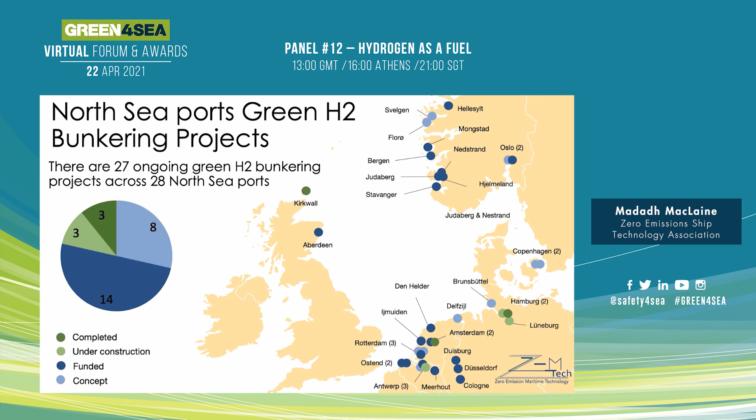So we've got momentum, this is moving forward. I think one of the biggest issues that we talk about in hydrogen is for the larger seagoing vessels.

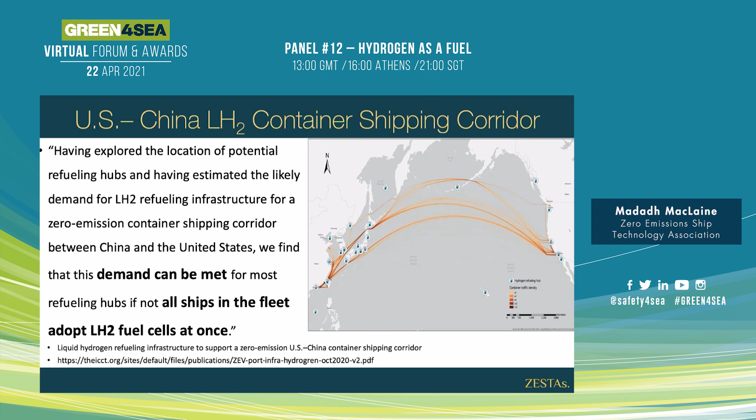The ICCT - well known for the study that exposed VW, I think that's what they're best known for - have done a study on a route from the US to China looking at container ships, and found that all vessels on that fleet could transition to liquid hydrogen. There'd be a slight shift in operational profile; some vessels would need to stop and bunker in the Aleutians, but this was found to actually be on their route. So with a shift in operational profile, all vessels, the largest vessels transiting from Asia to California, would be able to operate on liquid hydrogen. I've put the reference in there, so if this is shared, which I hope it will be, you'll be able to look that up for yourselves.

Another thing we talk about is the cost of hydrogen. I think one of the problems is that renewable energy and green hydrogen projects are really at pilot stages - we're talking megawatts now in hydrogen production. We really need to be talking about gigawatts.

And when we get to 2030, we will be talking about gigawatts, and we will have achieved economies of scale and a levelized cost of hydrogen of around $2 a kilo. That translates to 2,000 US per ton. Now, the energy ratio between hydrogen and low sulfur fuel oil is around 3.3. So if we take the price of low sulfur fuel oil in Rotterdam on the 1st of April, in equivalent energy, that's 1,666.5 dollars US for low sulfur fuel oil to equal the energy of 1 ton of hydrogen.

Going forward, we can be assured that there will be market-based measures. We don't know what and how much, but given the conversations happening, we can assume they'll be around 100 to 300 dollars US. This would bring the price of low sulfur fuel oil up to around 2,000 to 2,500 equivalent energy post 2030. So you can see that's equalizing that price, equal or even less, for hydrogen in 2030.

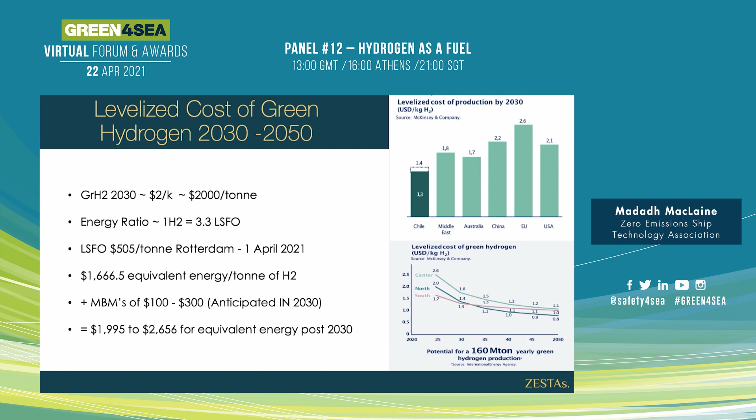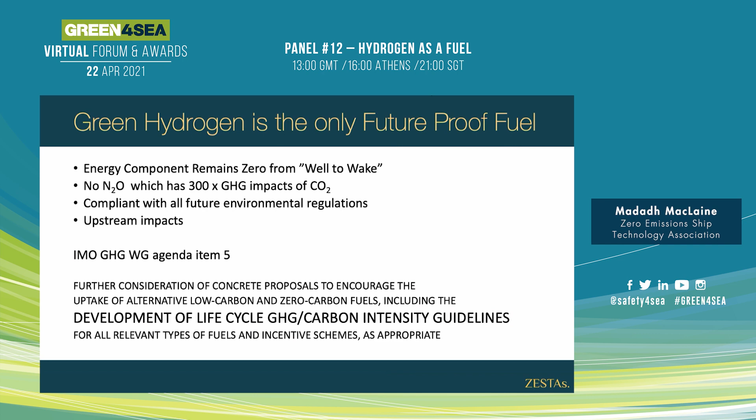So the reason why the Zero Emission Ship Technology Association gets behind green hydrogen is that it's the only fuel where the energy component remains zero from well to wake. There's no nitrous oxide, which has 300 times the greenhouse gas impacts of CO2. It will be compliant with all future environmental regulations due to the lack of upstream impacts. This is very important when we look at IMO greenhouse gas working group agenda item 5, where we'll be looking at considering upstream impacts, and the development of life cycle greenhouse gas carbon intensity guidelines for shipping. So green hydrogen is the only maritime fuel accepted as zero by zero greenhouse gas emissions by the Zero Emission Ship Technology Association.

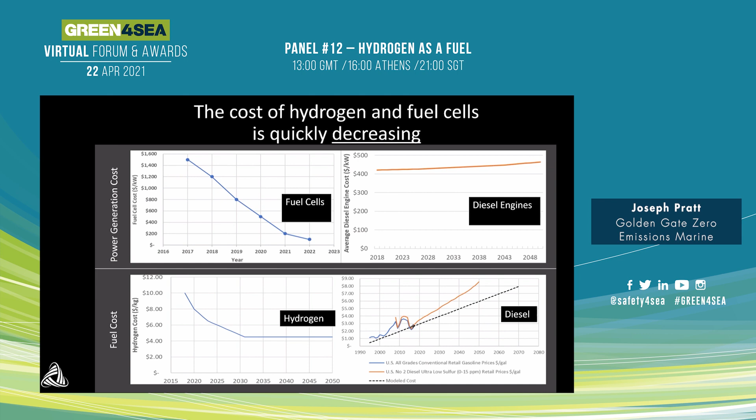And as Madadh showed, as we get more renewable energy and the cost of renewable energy decreases, the cost of hydrogen is also decreasing. The result is a lower total cost of ownership for a vessel at the least. It will soon be at the point where installing fuel cells and hydrogen is actually cheaper than conventional power. When we look at other fuel types in consideration, I want to point out two things. Number one, if we're talking about zero emission, hydrogen is the only way to do that, or you make synthetic versions of the fuels listed on this page.

But every fuel here, and I showed the chemical formula for all of them, contains hydrogen. So if you're making any of these from hydrogen as a renewable fuel, you need to start by making hydrogen. So why then would you take the hydrogen and convert it another step to something else when you can use it directly and get zero emissions?

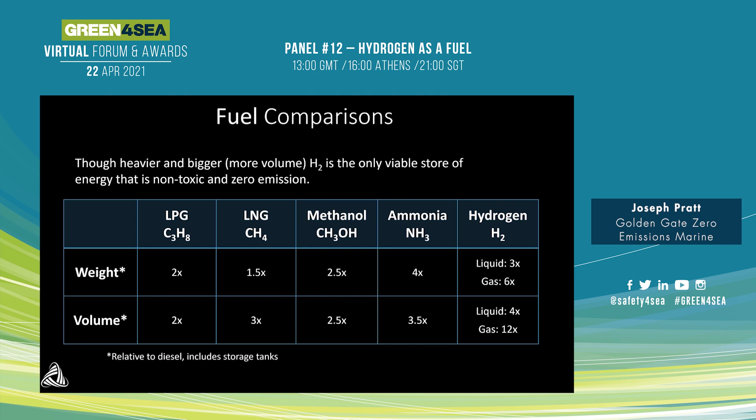The reason primarily is people are concerned about the weight and the volume of hydrogen. But as you can see on this slide, it's not a huge difference between the existing solutions, especially when you're talking about liquid hydrogen. Now, there is a difference between liquid and gas, and I'll talk about that next.

This is an example vessel with a pretty large installed power, about 38 megawatts, and it travels around 200 nautical miles on its route. We could do this vessel using fuel cells and gaseous hydrogen without modifications to the passenger handling or cargo handling capability, but you would only get one-way trip.

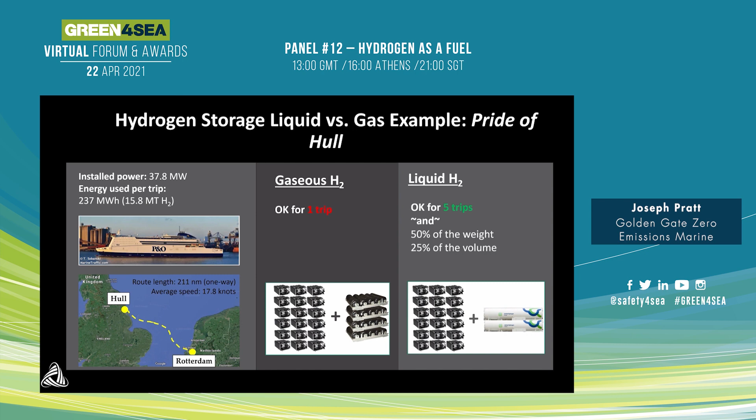If you go to liquid hydrogen, you can store more hydrogen on board, and you could go 5 trips and have 50% of the weight and 25% of the volume. So this shows the importance and the difference between liquid and gas.

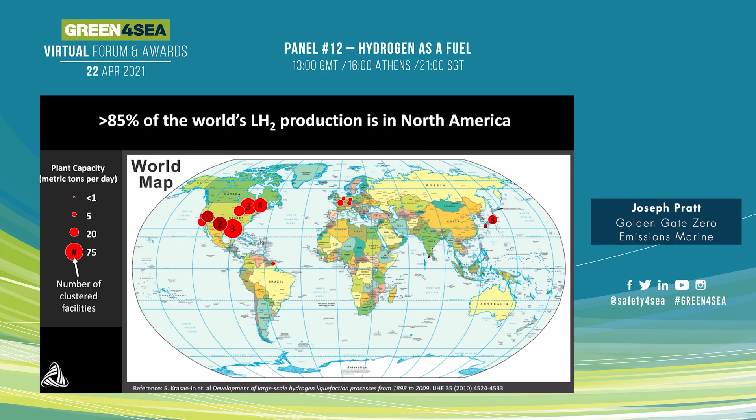This is important because in most of the world, liquid hydrogen is not readily available. Over 85% of the liquid hydrogen production and distribution is in North America today. So in order to take advantage of the properties of liquid hydrogen, this gets back to one of the other challenges I spoke to earlier, which is the establishment of liquid hydrogen infrastructure around the world.

I want to conclude by just noting two of our most famous projects. One on the left is the Water-Go-Round, or Sea Change, and that will be beginning sea trials very shortly here. And the other one is the small fast boat.

One of the vessel types that was most challenging to convert to hydrogen fuel cells was actually the smallest and fastest. So in our way of doing things here, we decided to tackle that next. Let's tackle the hardest challenges first. We have a grant-funded project to build a small, fast hydrogen fuel cell vessel that can be used as a small harbor craft, patrol vessel, things like that, and also recreational boats.

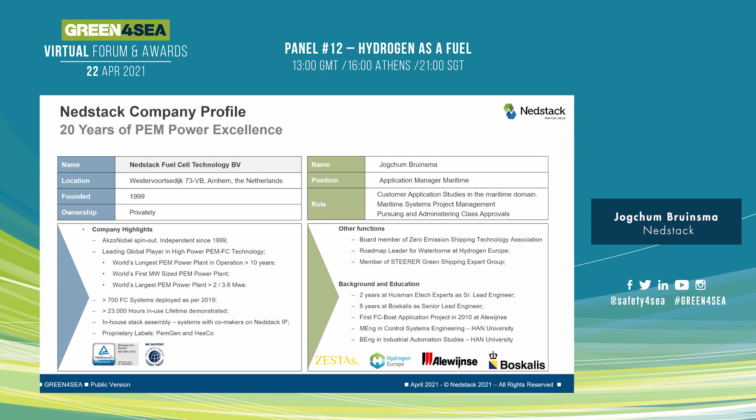At Nedstack, we are proud to have our fuel cell excellence from powder to power. So we start with bulk molding compounds. We make our own cell plates, our own cell voltage monitoring system, and assemble them into fuel cell stacks. Those fuel cell stacks are our building components in fuel cell driven power plants, and those power plants we build with co-makers from the industry. We build together with maritime system integrators, building power plants to fit maritime use. For instance, for industry, we use other integrators because we want to combine the best of both worlds.

We have a track record in fuel cells. So fuel cells are not new. The first power plant that we've built was already back in 2007. It's been running over 10 years, showing that fuel cells are capable of running very long operating hours without requiring a lot of maintenance.

We also built the first megawatt power plant, which was already also 10 years ago. So also large scale fuel cells are not an issue. And the largest fuel cell power plant is over 2 megawatt electrical power, which is also built by us. And all of these plants are located in seaports, so we are very acquainted with the salty air, which is not a problem in our system.

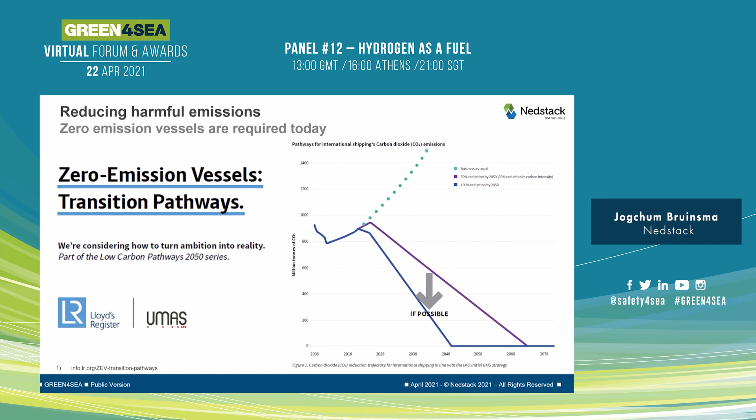So why think about fuel cells? There's a simple answer. If we look at, for instance, this study from Lloyd's Register and UMAS, if we want to bring emissions down, as we agreed in the IMO, we need to do something today. And zero emission vessels are gonna be a big part of that, because that will compensate for the vessels that we cannot make zero emission straight away. And fuel cells deliver this option.

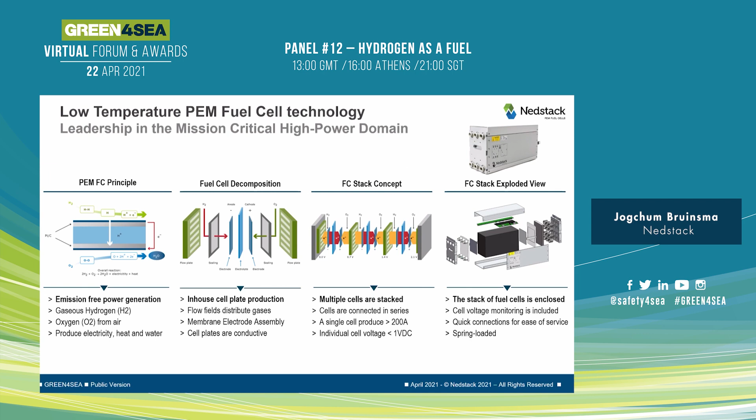In a fuel cell, there are no other emissions than pure water, because you're not actually burning anything. You just have a chemical reaction between hydrogen and oxygen forming pure water. And in this process, you have electrical energy, which we can harvest from the fuel cell stacks and use to propel vessels and to power, for instance, accommodation. To overcome the first hurdles, we are also working on concept designs.

To find out what we have to do when applying fuel cells in a vessel, we've worked on a tugboat, which is very small and contained, but also on a DP2 offshore vessel, for instance, which seems to be very feasible to start now doing zero emission operations when at the wind park. And maybe for transit, you still have a hybrid diesel application, but you can start with this hydrogen fuel cells today.

And one of the other things we see ports struggling with is applying large power shore connections, and with mobile shore connections, you could also supply megawatts of electric power to big ships that are in port to be able to switch off their main engines.

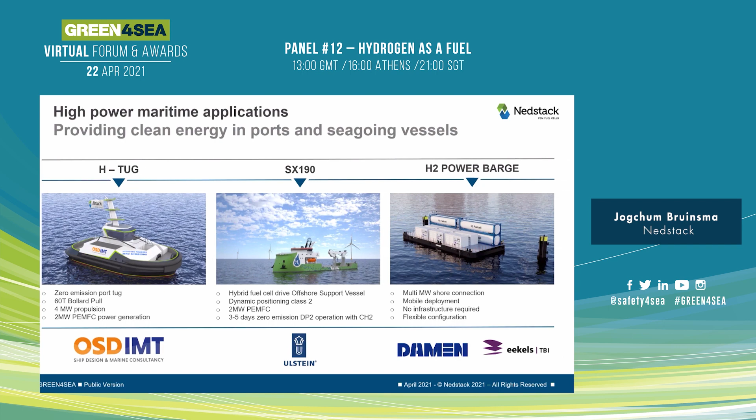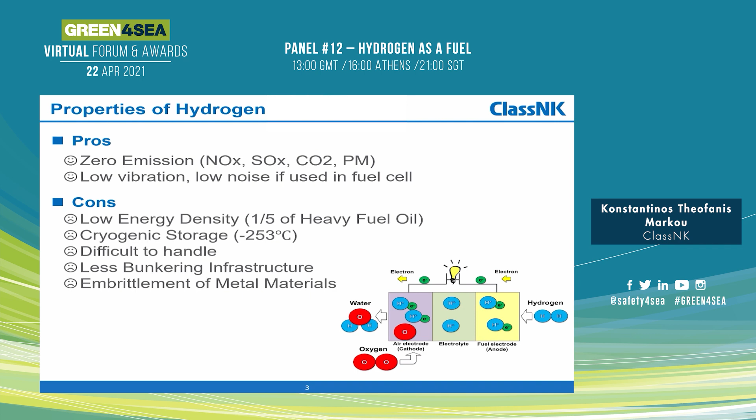The world's first hydrogen fueled ferry to be commercially in use is probably the MF Hydra. More details will follow in the next slides.

In Japan, the situation is presented also. ClassNK is engaged in a tourist ship project led by NYK, and other projects by the E5 lab. We will explain this in the next slide.

The project is led by Iwatani Corporation and KEPCO, the electricity company of Japan, and is aiming to develop a ferry to be commercially in use for the 2025 Osaka World Expo.

Yanmar is also planning to conduct a demonstration operation of a pleasure boat using Toyota's fuel cell this year. The demonstration operation of the prototype has already been completed.

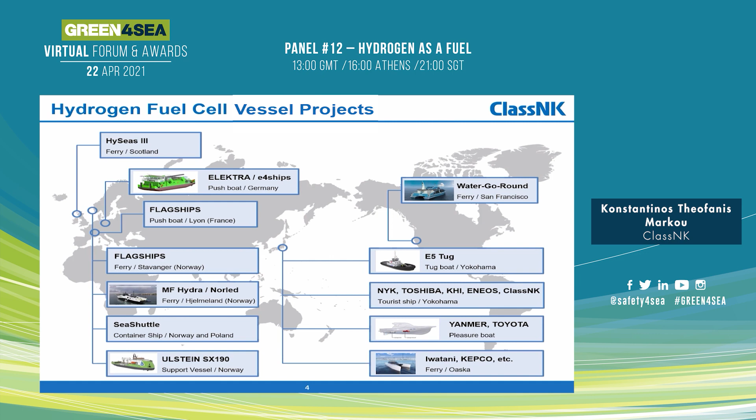Another project presented before was the Water-Go-Round, which uses fuel cells by Hydrogenics, a composite tank by Hexagon pressurized to 250 bars, and a hull made of aluminum. It is equipped with a 100 kilowatt-hour battery.

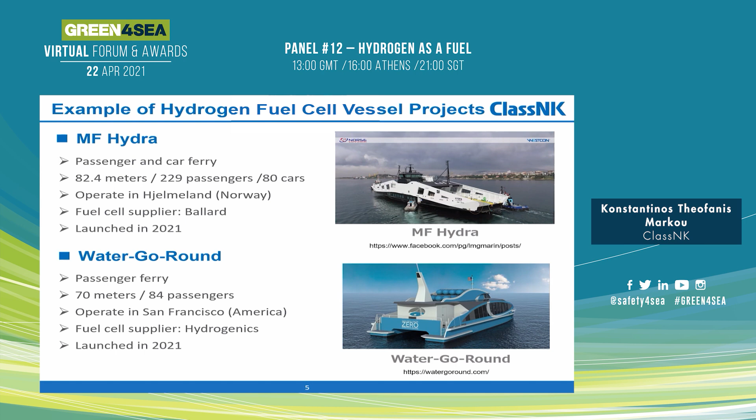Demonstration testing is conducted by Sandia National Laboratory, Department of Energy in the USA, and the project was scheduled to launch in 2020 but has been slightly delayed, now scheduled for 2021. Either MF Hydra or Water-Go-Round are forecasted to be the first commercially used ferry powered by fuel cells.

Manufacturers with business experience of fuel cells for land use are also trying to expand into the maritime sector. The fuel cell module developed by Nedstack has been used in demonstration projects in Europe, as we have seen before, and the fuel cell module developed by Hydrogenics is planned for use in the US Water-Go-Round project.

Toyota is also scheduled to obtain type approval for marine use around 2022, and Toshiba is planning to enter the marine business in 2021 as a NEDO, the New Energy and Industrial Technology Development Organization in Japan, target. These Japanese companies are now under discussion for obtaining ClassNK approval.

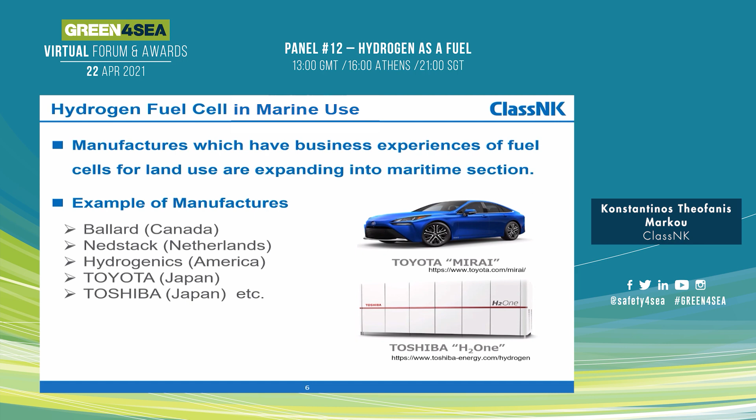Two more projects are presented here. The first is the E5 lab with the E5 tug project. It uses battery as the main power source and hydrogen fuel cells and generator as an auxiliary power source. They are planned to be commercially used in the port of Yokohama by 2022.

The second is a sightseeing boat in Yokohama, a mid-size sightseeing boat with a capacity of 100 passengers and gross tonnage of 150. NYK is leading the project. Toshiba is implementing the fuel cell system on the ship and developing the operational technology.

Kawasaki Heavy Industries is developing an onboard hydrogen fuel supply system and the EMS. ENEOS is developing a hydrogen fuel supply system. And ClassNK is conducting the safety assessment of the fuel cell equipped ship.

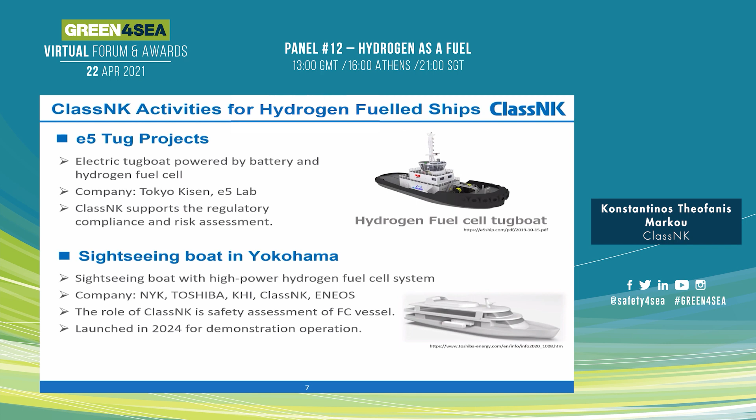IMO's guidelines are presented now. The guideline for ships equipped with fuel cells was scheduled to be finalized at CCC 7, but has been postponed and rescheduled to September 2021. The Maritime Safety Committee review is also rescheduled, to October 2021.

The guideline is a compilation of general requirements for fuel cells, so it doesn't have any requirement for a certain fuel. Additional guidelines for methanol and other fuels will be applied in those cases.

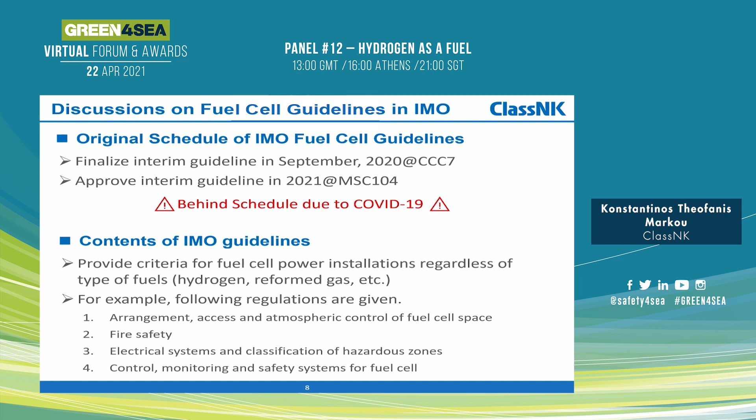NK guidelines for fuel cells: currently, revision on rules for the survey and construction of steel ships, Part H, are being developed, incorporating information for large capacity storage battery guidelines. Updates on the guidelines for ships using fuel cell systems are scheduled and will be developed according to the progress of the projects we are currently participating in.

Thank you very much for your attention.

Thank you very much, Konstantinos. Now we'd like to have a discussion, and I would like to thank you for the presentations. You highlighted a number of practical examples. However, I'm starting from the end because Konstantinos highlighted a number of issues. I'll start with the easy one, the legislation. I understand one of the impacts of COVID is that it has applied a pause in a number of things—no one can visit the IMO building.

Visiting to the IMO building will be resumed. This is what the guys close to the IMO are saying to us - early June, maybe. Now, we are behind schedule.

I assume, and I would like you to confirm, that more or less the regulatory framework will be in place in the years to come. I think all of this is a technical challenge, but I think we have the means as a community in shipping to make this happen. Do you see any sort of difficult challenges with regards to regulation?